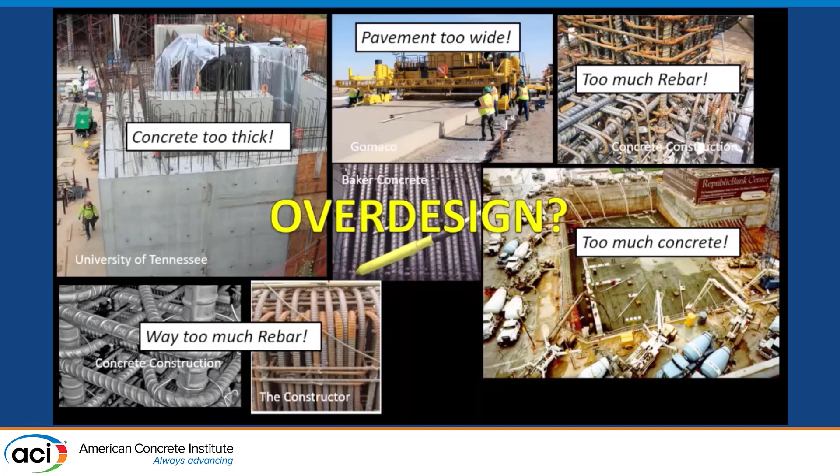So I think most of the time when people are talking about overdesign, they are talking about the topic that Eamon so thoroughly covered: the focus on the so-called overdesign surrounding the 28-day concrete cylinder compressive strength, the so-called F'(C) or specified strength. That technically is a specified 28-day strength of lab-cured compressive strength.

To get a number from the laboratory that is worthy and qualified to be used to assess the quality of the concrete, it's got to be cast per C31, initially stored on the site for up to 48 hours without moisture loss, 60 to 80 degree air temperature, limited to 68 to 78 if you're looking at 6,000 psi or more.

It also says shielded from direct sunlight, which is a direct copy of the Roman Empire's imperial concrete specification written by Marcus Vitruvius in his book On the Nature of All Things. He says aggregates for concrete need to be shielded from sunlight and moonlight, and ASTM decided well, we got to do that. There was always this thought that people exposed to too much moonlight would go crazy, and that's the source of our word lunatic. I've also heard that only lunatics would wait 28 days, or one full lunar cycle, to test their concrete.

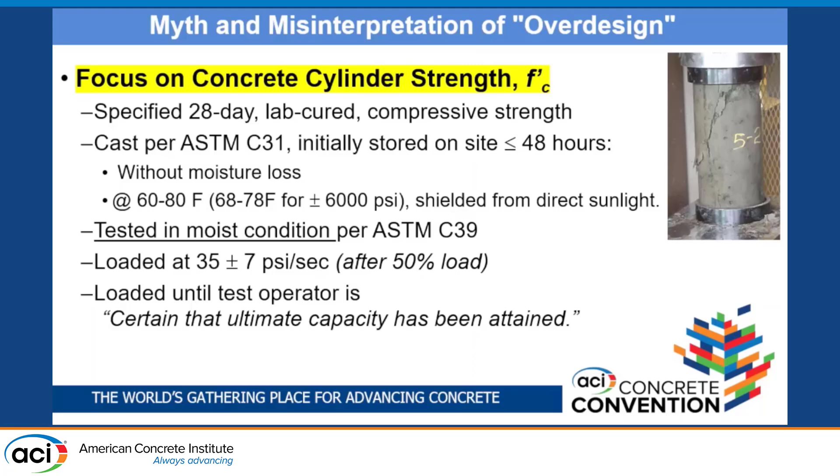Now, when we're talking about this overdesign that people like to swear about, let's take an example. Let's say you got a specified compressive strength of 5,000 psi, but then some clown comes along and says, well, the truth is it said 5,000, but we really meant 5,470. That brings out all kinds of responses. That 470 psi is usually referred to in the field as that blank overdesign, and you can fill in that blank with whatever expletive you would like, colorful or off-colorful.

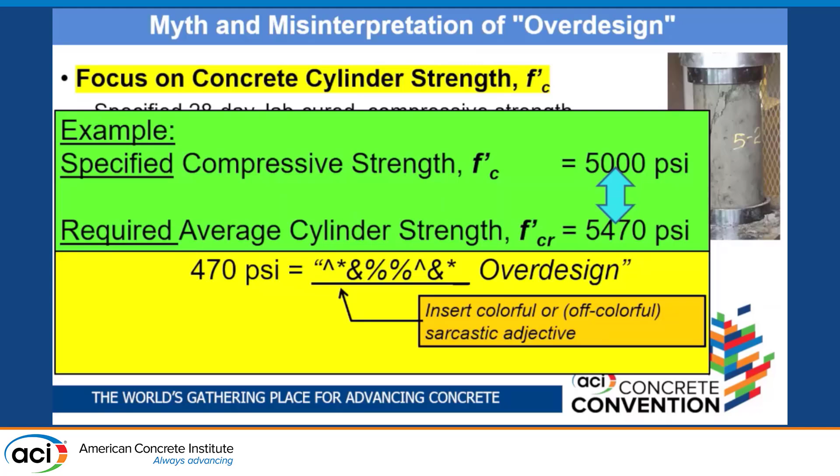So what are some of the misinterpretations? That this costs money, consumes resources, carbon footprint. Yes, it can - anytime we put more cementitious material in, we're going to cost money and consume resources and carbon footprint. But even worse is the misinterpretation that this is arbitrary, it's conservative, it's some sort of building code imposition. It's a convoluted way to get higher strength than specified. It's going in the back door.

This is the specifications bait and switch. They told us 5,000 in writing, but now they're telling us 5,470. And it might cause people to say, why in the world didn't they just specify 5,470 instead of the 5,000 that they wrote in the specs in the first place?

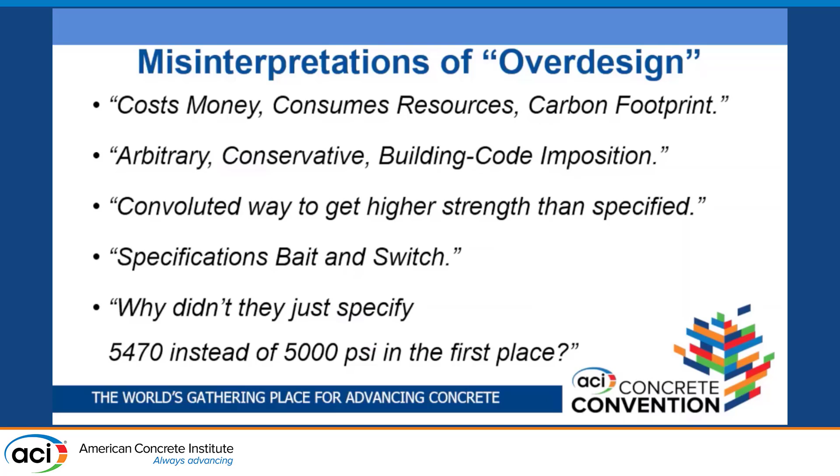All right, those are interesting issues. Now, some constructive interpretations would be that this increases the safety and reliability of concrete structures for all users, all passersby, all future owners. It helps to define the tolerance for the acceptability of our strength test, and it can reduce the time and cost spent dealing with and arguing with low breaks. And these were also on Eamon's list.

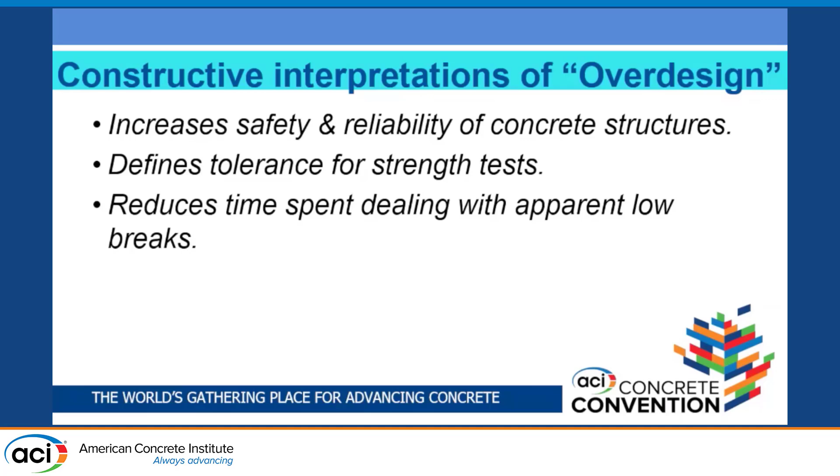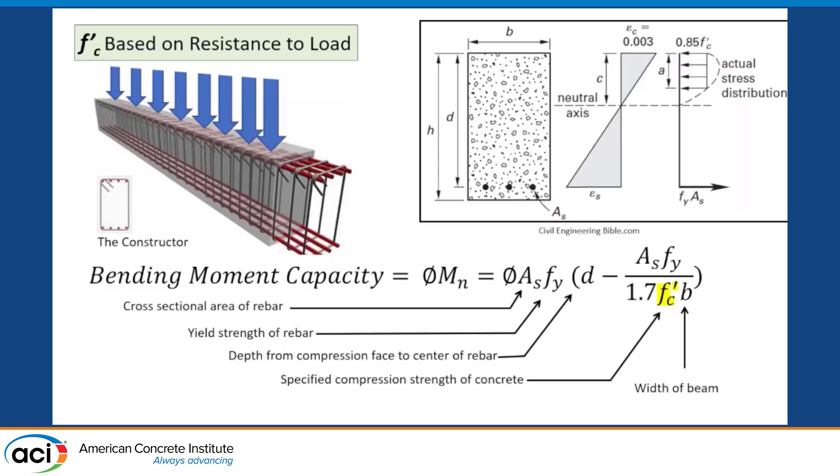Now, where does that F prime C come from? Many of you know this exactly. Part of the F prime C comes from the engineer's calculations based on the mathematics and the mechanics of what compressive strength do we need to assume in this structure to be able to provide the necessary resistance to load. But there's another side of that coin - there's another independent source of what F prime C we're going to need, and that's based on providing adequate resistance to the environmental exposure.

Going all the way back to the 2008 edition of the 318 code, that's when the environmental exposure system was introduced to try and quantify the environmental resistance that we need. That was born as a result of NRMCA's P2P initiative.

The F0 is not exposed to freezing and thawing, up to the F3, which may only be with us a few more years, that's exposed to freezing and thawing. It's wet, and we've got de-icing salt on it. The C0, there's no real corrosion risk. The C1, it's kind of moderate. The C2 is now we've got some real chlorides in place. And there's others for sulfates and moisture and that sort of thing.

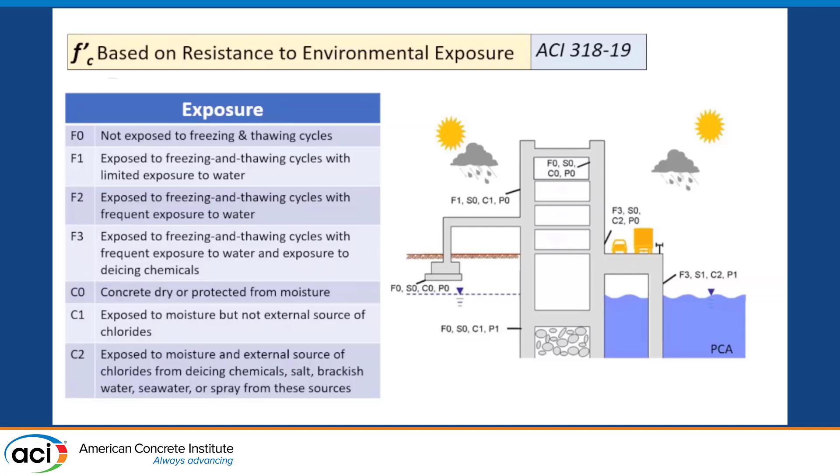The design engineer is required to clarify what is the intended exposure classification, and then you work through the fine print and some charts and tables, and you end up associating minimum specifiable compressive strengths that are connected to various exposure categories.

For an example that I want to run today, let's say that this structure is going to be exposed to salt, exposed to freezing temperatures while it's wet, and we are concerned about corrosion of reinforcing steel. That would bring us to an F3 that says 5,000 psi is the minimum specifiable value, and the C2 tells us the same thing. If we have an intense corrosion environment, we're going to need 5,000 psi.

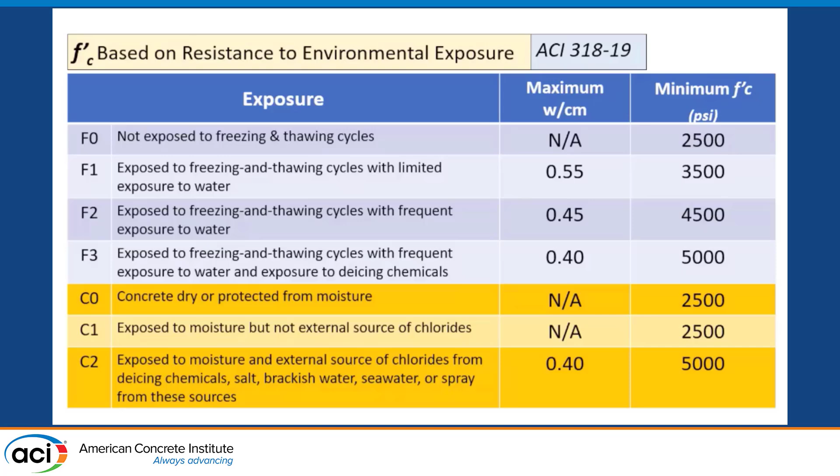Now, interestingly, where do these numbers come from? If we were to take the ACI 211 default values for the relationships between water-cement ratio and compressive strength, the solid line is non-air-entrained concrete, the dash is air-entrained. So we see as the water-cement ratio goes down, strength goes up.

And if we also take a look at some old Bureau of Reclamation information about how water-cement ratio influences the permeability of the concrete, we'd say that if we want a more durable concrete with lower permeability and other related transport properties, and we want high strength, that's going to throw us down to this region of the curve. This association here is, if it's going to be moist and freezing,

without the de-icing salt, we want to be right around a water-cement ratio of 0.45 or less. That would intersect the 211.1 data at about 4,500. So a number like 4,500 becomes a minimum specifiable for a freeze-thaw environment.

If we then say, well, I need even lower permeability, let me go down to around a 0.4 to come down on this permeability curve. That's going to help keep the water and the salt and the oxygen and the CO2 and the pets and the small children from being sucked into the concrete. And then we run that up, and that's going to intersect the air-entrained curve at about 5,000. So there's some justification for these numbers.

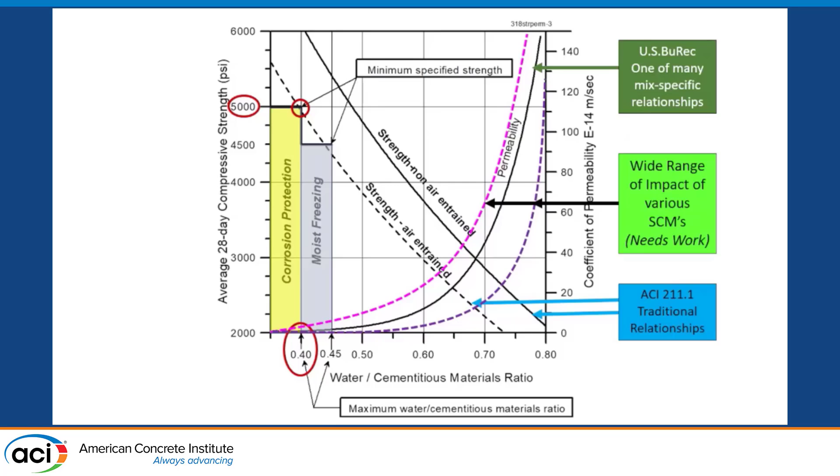Now, since those relationships are mix specific, I think there is no question that that wide range of other modifications on the mix gives us some room. We need to do some work there, and I know Colin and Doug Hooton and a number of people have been working on that. Anyway, that's where that comes from.

So let's take a quick example. We've got C2 corrosion, we've got F3 freeze-thaw, and let's say the structural engineer designed it for 4,500. When the design calculations were done, 4,500 was picked. If we take a look at our C2 and our F3, that says 5,000. So what was supposed to happen here? You say, all right, I've got a strength and mechanical properties requirement, I've got a durability requirement, the highest requirement is going to govern.

So we got a minimum specifiable value of 5,000 psi for a structure that maybe looks something like that. And Bruno, these steps look even worse than when you were on campus.

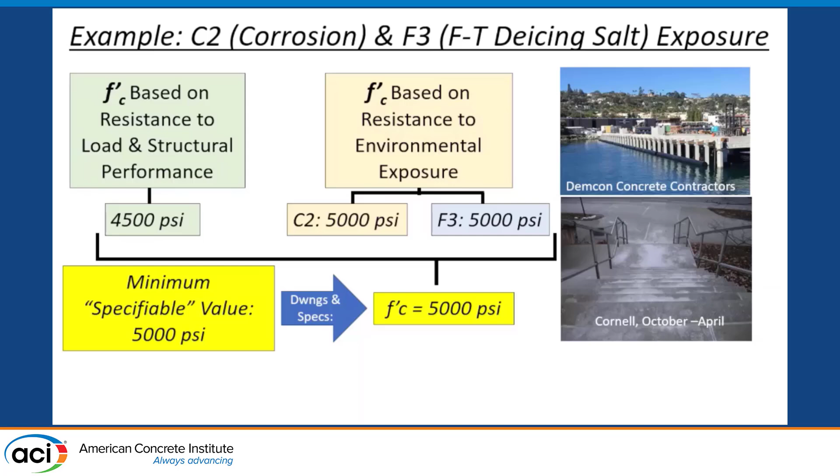All right, so we got the 5,000 psi. Now, if the specified strength is 5,000, is it okay if the average strength is 5,000? Well, let's look at that. Here's the good news.

If your average strength is 5,000 and your required strength is 5,000, then let there be dancing in the streets, because half your breaks are stronger than required. But unfortunately, there's not going to be peace in the valley, because half your breaks are weaker than required, and that gives you about a 50% chance of meeting the spec.

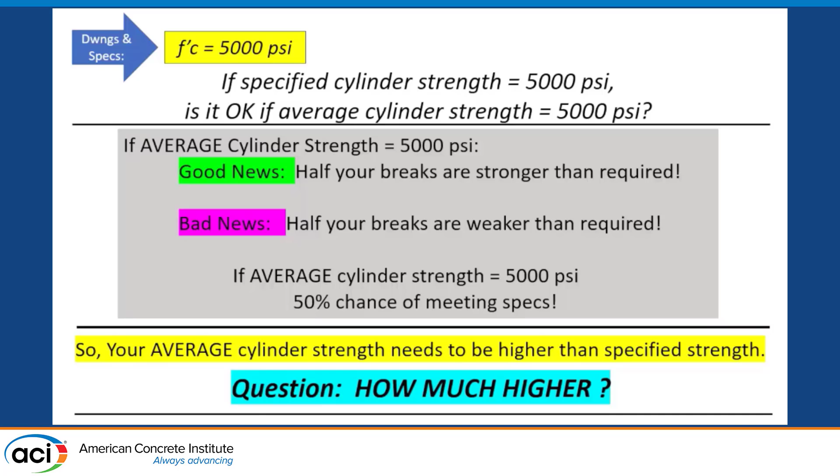Imagine in that pre-construction conference, you're talking to the structural engineer, and you say, we promise you, we're going to meet your strength requirement at least half the time. Okay, that ain't going to fly. So if your average has to be higher than the specified, how much higher?

And that's where we go into the mysterious land of the so-called overdesign. What would be the lowest average strength that you could have that would be consistent with meeting those requirements 99% of the time? Let's be bold. Let's go all the way to 99. And that's the question that we're posing here today.

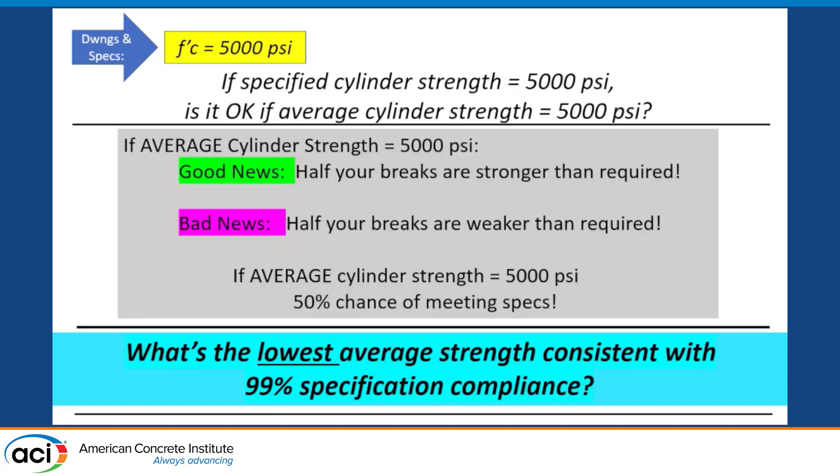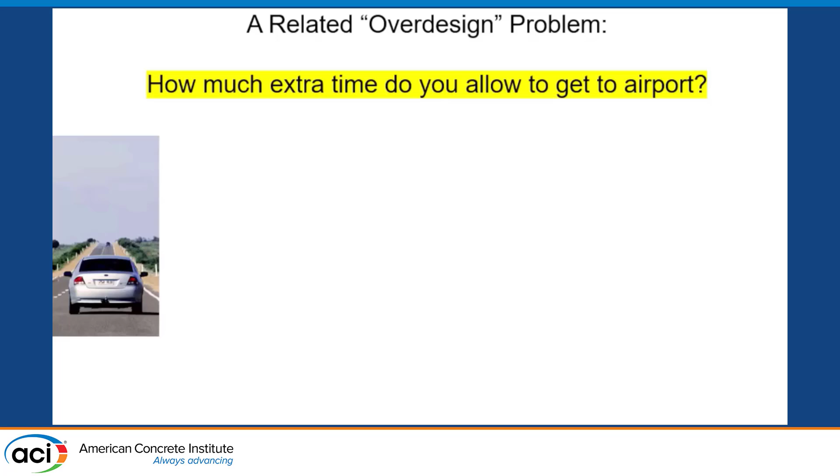What I want to share with you is that's not all that unusual of a question for all kinds of other applications. For example, a related overdesign problem: how much extra time do you allow to get to the airport? Because you got to pack your car, you got to get in the car, you got to back out of the driveway, you got to remember what you forgot, you got to pull back in, you got to go grab whatever that is, underwear, chapstick, your laptop, whatever it might be. Then you head down the road, and then you get to the airport, and then you look and look and look for a place to park.

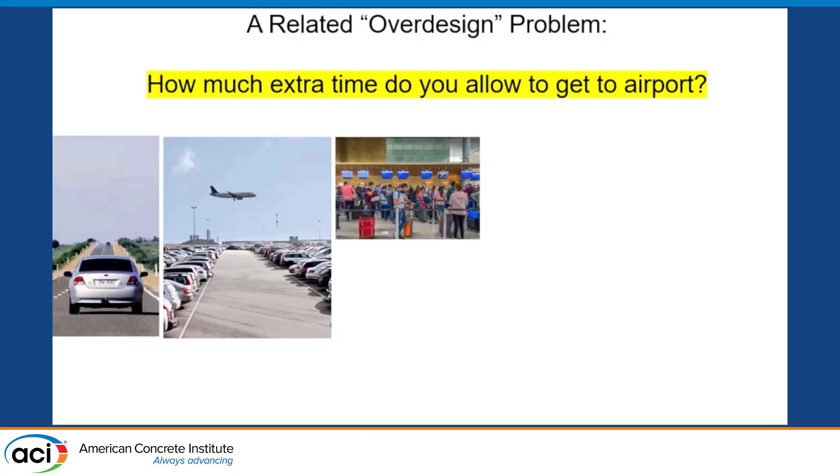This is almost precisely what happened to me last Friday morning at Syracuse Airport, okay? And then you got to get to the check-in and get rid of your suitcase, and then you got to go through TSA, and then eventually you stand in the jetway as your plane is gone. All right. Now, this will be no surprise.

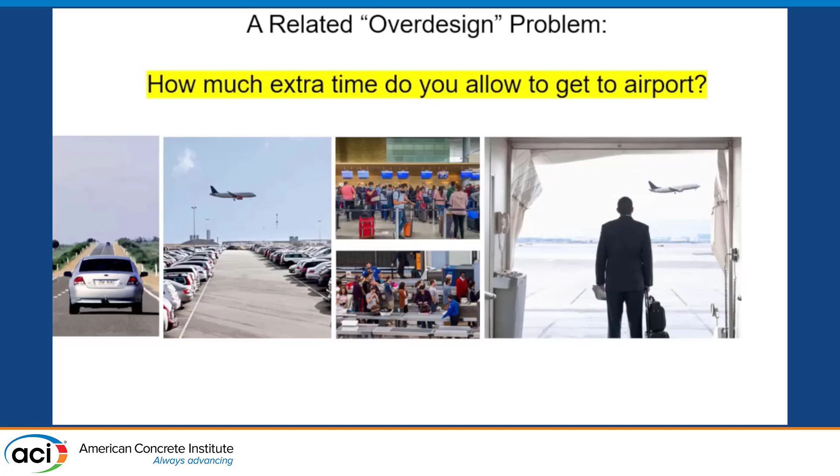Nerd that I am, I've been tracking this. My longest time to Syracuse Airport after 37 consecutive trips is 130 minutes, a little over 2 hours. My absolute shortest, and man, I was sitting down on it for that one, was 62 minutes. But on average, it's 93 minutes.

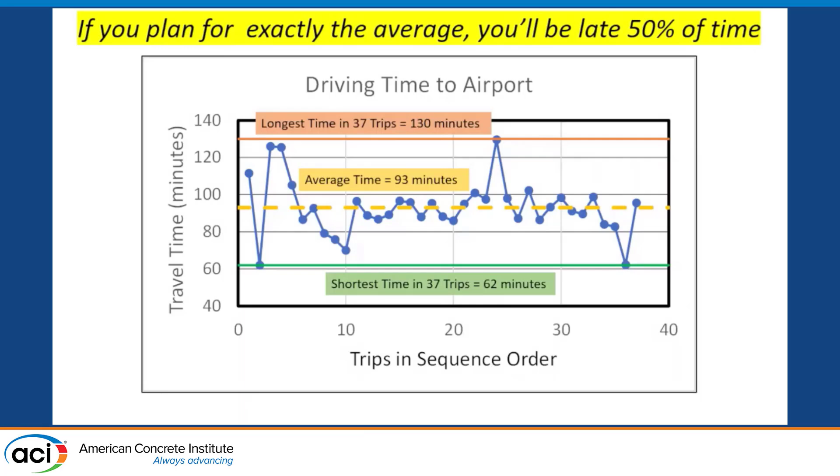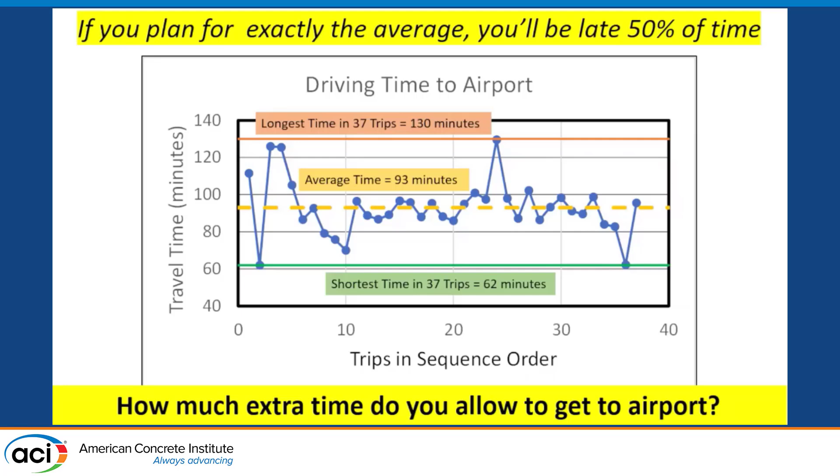So if I would say, okay, I'm going to depart for the airport 93 minutes before I have to be there, half the time I'm going to make it. That's really pretty good. But also half the time I'm going to be saying goodbye to my airplane. So how much extra time do you allow to get to the airport? You've all got an answer to that question, okay? And I'll tell you, last Friday morning, I wish I had put an extra 15 minutes on that baby, okay?

Now, is that extra time that you are allowing to increase your chances of not being left at the gate and then being told that the next plane to San Francisco is sometime in August? Is that extra allowance that you provide an overdesign? Okay, there's a thought. Now, here's some good news for you. A very good friend of mine from New Zealand, Andrew Dallas, past president of the New Zealand Concrete Association, once told me, Ken, if you never missed a plane, you are getting to the airport too early. Okay, so how close to the edge do you want to live?

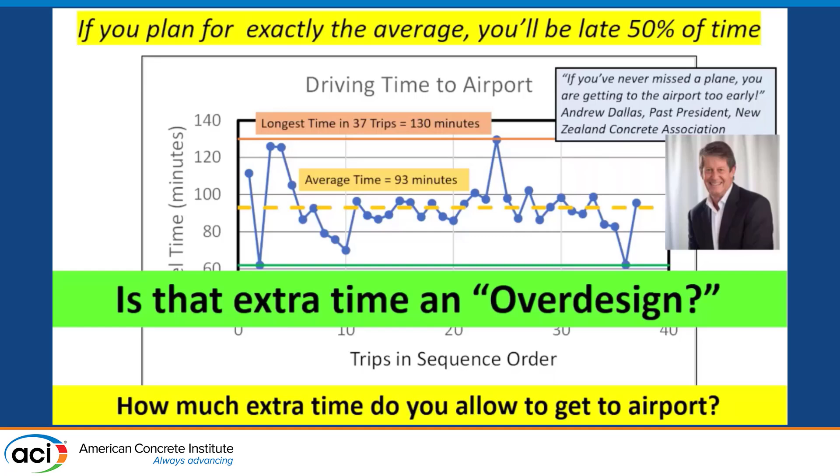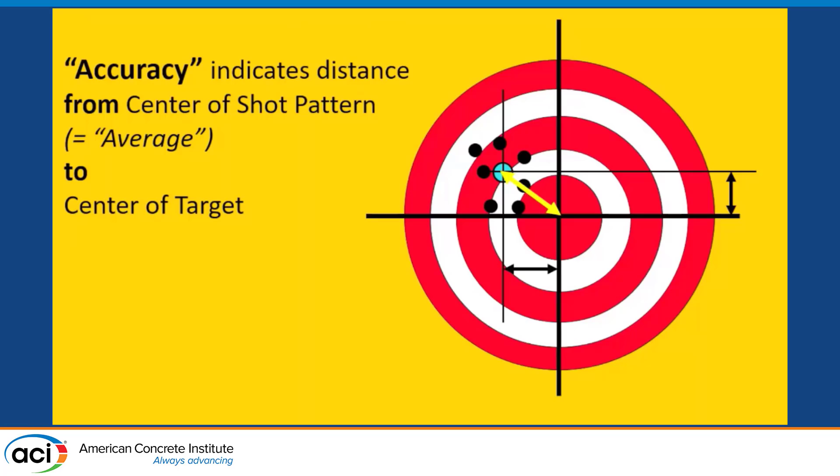Okay, now let's do an entirely different analogy. Let's look at a target. And let's first of all talk about the difference between accuracy and precision. Accuracy would be represented by how far the center of your shot pattern is from the center of the target that you are shooting at, okay? And precision is how tight your shot pattern is.

And I'm looking at Larry here, and if we're not careful, he will pull out his pistol right now and shoot out this screen. Larry, I'll bet you put about 6 right in the center there. Okay, so precision. All right. They confiscated that at the airport, right? And you tried to tell him this is a visual aid for Ken's talk.

Okay, all right. Now, the common measure of precision is that we take a look at how far from the center of the shot pattern would you have to go to draw a circle so that you would cover 68%, let's call that 2/3, of all the shots. So if we said we had a 5-inch radius from the center of the shot pattern, what that would mean is 2/3 of all of our shots are within 5 inches.

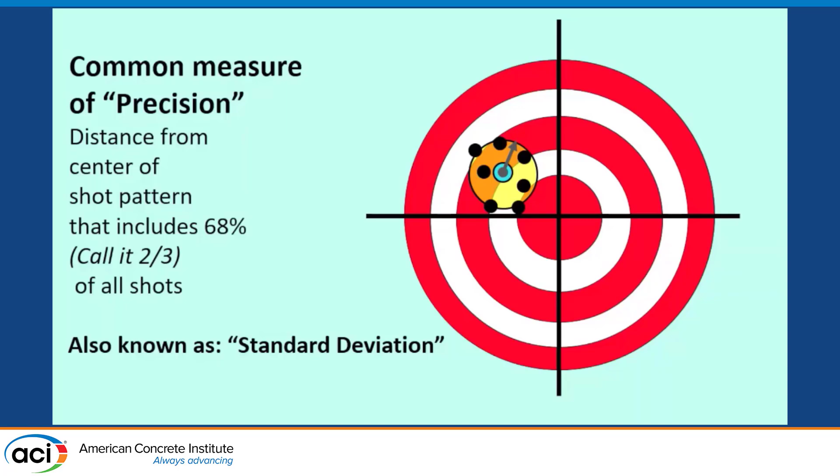Okay, now let's translate this to another problem: the famous legend of William Tell, revolutionary soldier in Switzerland and Europe's greatest archer. One day he offended the town magistrate, so the magistrate punished him by saying, 'You're such a famous archer, what we're going to do is tie your son to a tree, and you've got to use that great crossbow of yours to hit the apple we put on his head.'

Now let's ask Bill Tell to go out to the field first and shoot a whole quiver of arrows into that target. Then let's get a bunch of nerds to measure how far all those arrows landed. If we found that 2/3 of all those arrows were within 5 inches of the center of that shot pattern, we could call that a standard deviation, which is much better than a non-standard deviation, that's for sure. So that would mean about 1/3 of your shots are more than 5 inches high, low, or wide.

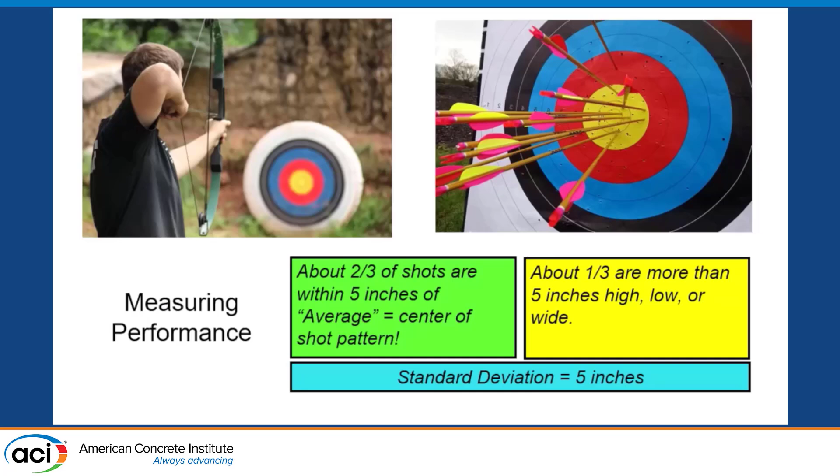Now let's go back to Bill and his son. So we're shooting, and if he's got a 5-inch standard deviation, that's bad news. That means 2/3 of those arrows are going to land within plus or minus 5 inches of the apple. That also means that from the apple down, there's a 50% chance it's actually going to kill his kid. That's not good. That's not good at all.

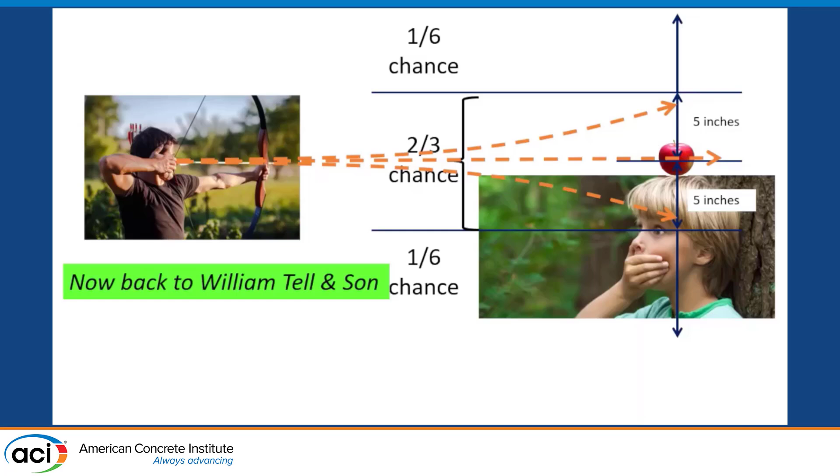So what's the solution to that, if the rules of the game permit? Well, let's raise the stupid apple. But here's the cool part: how far we raise the apple depends on the skill of the archer. Let's say Bill's having a bad day, we'd have to raise it way up there. But what if the child's mother shows up and she's really good? We can lower that apple back down, because she is a better, more precise archer.

Now, what if we get men in tights to shoot? We better put that apple 5 or 6 feet above.

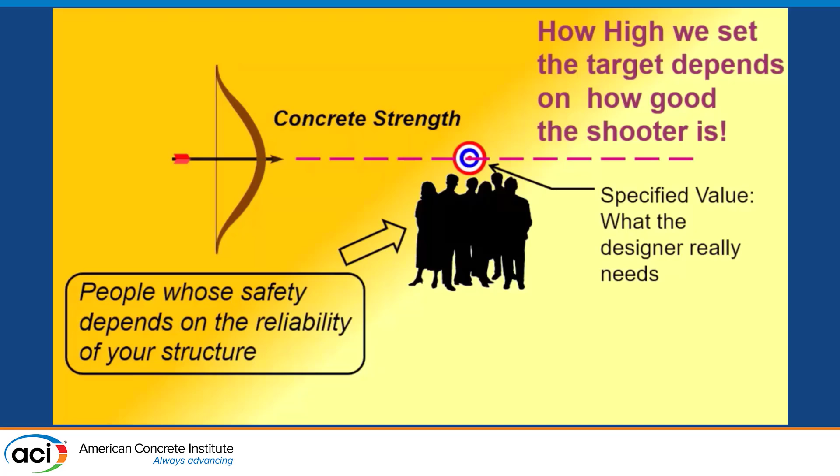Now that is what we are trying to do with overdesign. We've got a whole bunch of people who depend on the quality and integrity of that concrete, and by how much are we going to raise that target to make sure those people — not just the owners, but the people who work and live and play in that structure, the people walking by or parking in it — how are we going to keep them safe enough?

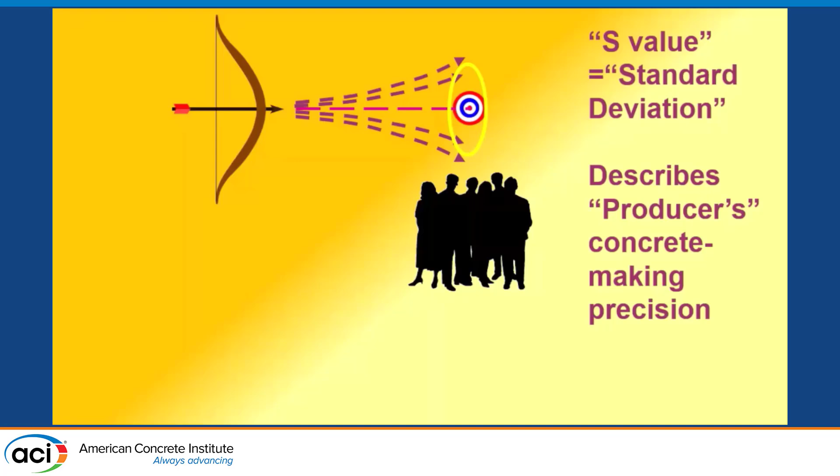So we're going to raise it up, based on what the standard deviation is — but not a standard deviation found in a code, a standard deviation unique to a particular concrete producer, with the idea that the better, the tighter the precision of a given producer, the lower we can drop that target. That's why there isn't a fixed number for how much the overdesign is — it's a function of the skill and capability of that producer.

Okay, but here's some breaking news which really messes up the game. That standard deviation we're going to use is not just a representation of the concrete producer. When the standard deviation gets high, the general interpretation is that the concrete producer is getting a little sloppy. No — the standard deviation is based on data for concrete made by the producer, sampled and tested by the test lab. So if the test lab's a little sloppy, it's going to look like the concrete producer is a little sloppy. That standard deviation really is a joint venture.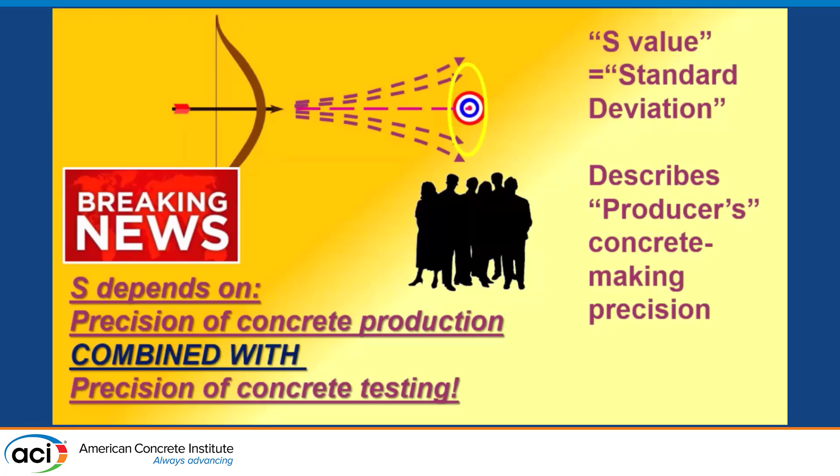So the required overdesign depends on the individual producer's unique value of standard deviation. We could take a look at some actual cylinder breaks there, and exactly as you just saw, what we're going to find normally is periodically there's going to be some breaks lower than F prime C, but we don't go to the wall and hit the panic button, as you just understood, okay?

So every now and then this is going to happen — this is the 'every now and then you have a bad day.' And then the question is, how bad does a day have to be to cause you to talk to your spouse about it when you get home that night?

Or perhaps not talk to anybody when you get home that night. The definition of a really bad day is when an individual strength drops more than 500 psi underneath. And that's the one where, if that happens one time in 100, okay, that's just part of life, as we heard.

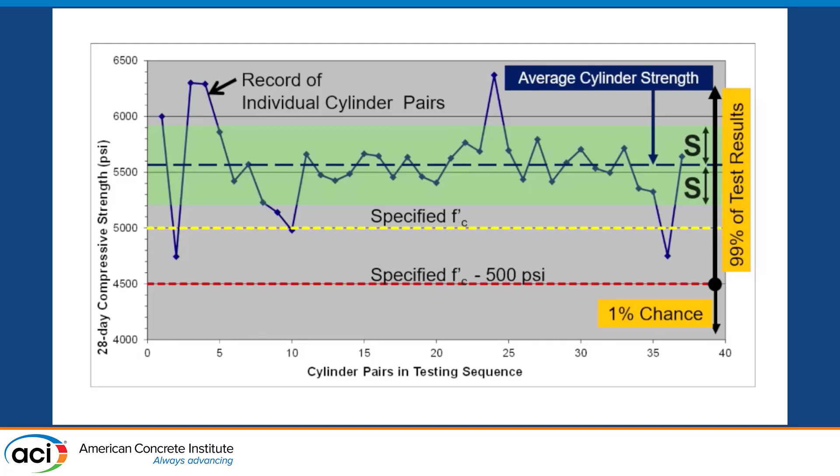Okay, so we get the average, and we can figure out the arithmetic of the standard deviation, and we can say, yep, two-thirds of all our cylinders are going to be in that band somewhere. We can use that and calculate the standard deviation. So occasionally we all have suboptimal days, and that's just life. That's nothing to quit our jobs about.

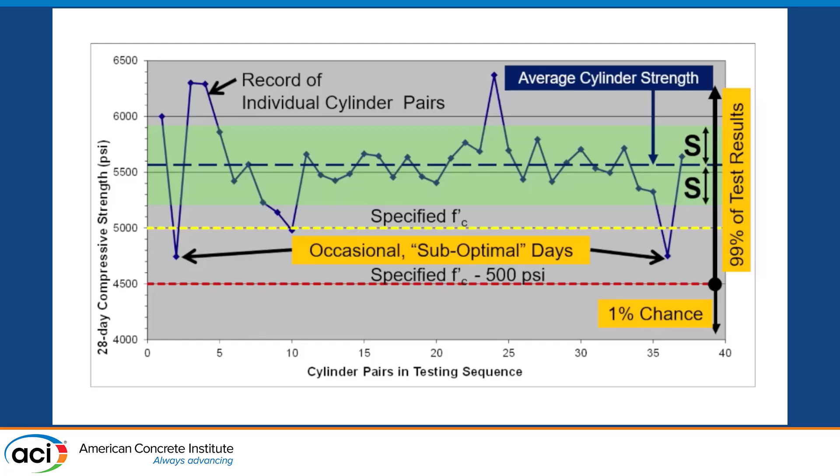Now, another really cool thing we can do is not only record the individual test results, but also what's known as the running average of 3. The individual test results say, yes, every now and then you get a bad test for any number of possible reasons, from production to testing. The running average of 3 starts by taking the first 3 tests and getting their average, then shifting over one and getting the next average, and shifting over one, and so on. What that does is filter out a whole lot of the noise in the system, and it starts to reveal systematically what is happening with the production and the testing.

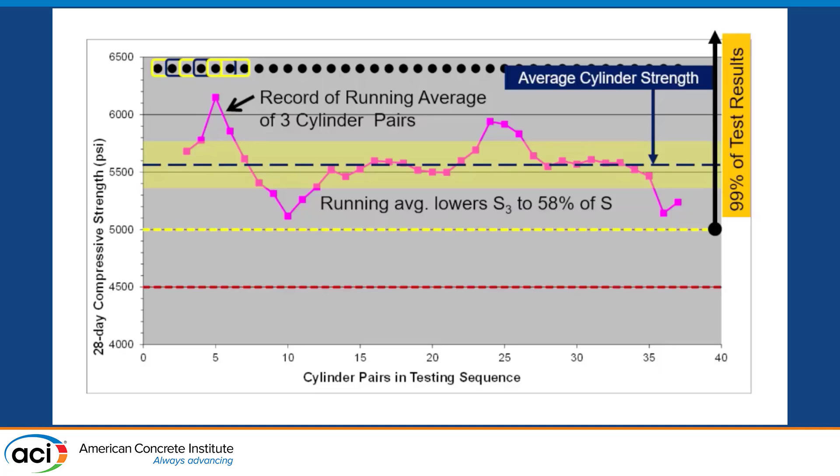So when you plot the running average of 3, you end up with the same average, but a tighter band. In fact, that standard deviation is only about 58% of the original standard deviation. What we're worried about here is systematically, when we're looking at test after test after test, the overall program, that's where we don't want them to dip down underneath the specified value. But if that happens 1% of the time, that's okay too.

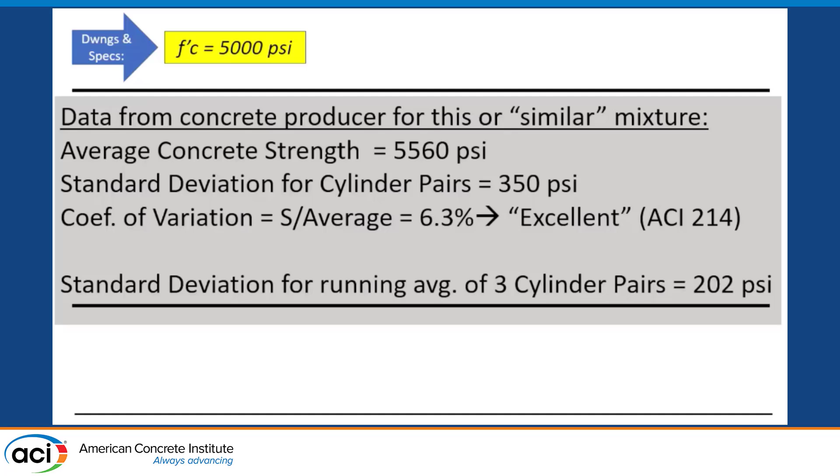Okay, so we get data from the producer. We got an average concrete strength of 5560. We got a standard deviation of 350. That's a coefficient of variation of 6.3%, which ACI 214 would say is excellent - excellent quality control. When we do the standard deviation for the 3-cylinder pairs, that's 202. Now, what's the lowest average strength that would signal 99% specification compliance?

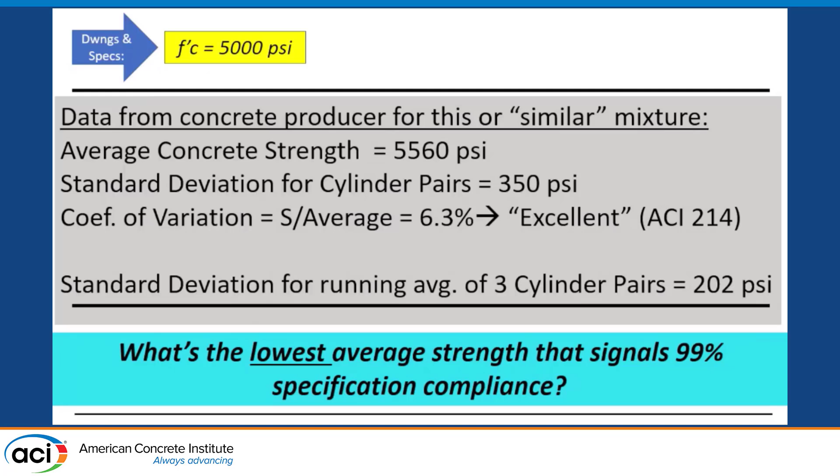Okay, that's the question. Now, sadly, to answer that question, we have to go through the looking glass, and we're going to use some probability and statistics, and that probably is the signal to evacuate the room here immediately.

Eamon was very gentle. He put some normal distribution curves up there. He didn't dwell on them because he knew that would be like pulling the fire drill.

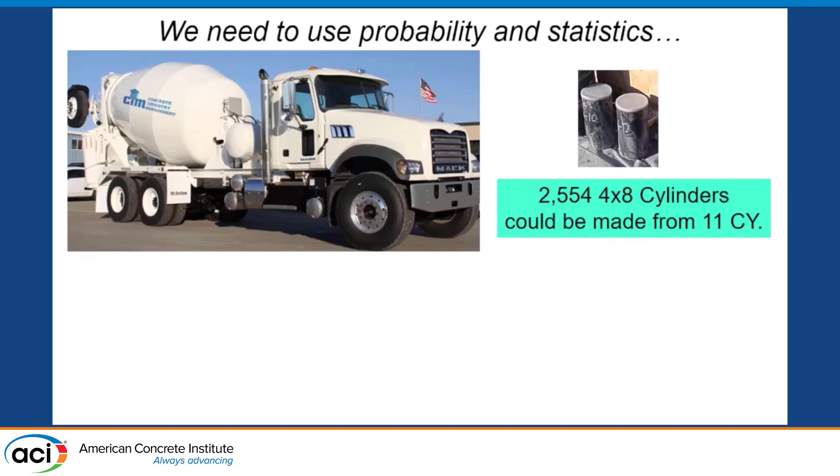All right, so we need to use probability and statistics, and why? Let's say we're using 4x8 cylinders, for example. Do you realize that out of an 11-yard truck, you could make 2,554 4x8 cylinders? That's possible. That would be what the cool people call the sample space.

In Night Moves by Bob Seger, one of the great phrases was, 'working on mysteries without any clues.' And we are almost there - we are working on mysteries with just a tiny bit of information. Statistics helps us fill in the blanks to estimate the strength of the vast majority of the concrete in the structure that was not tested.

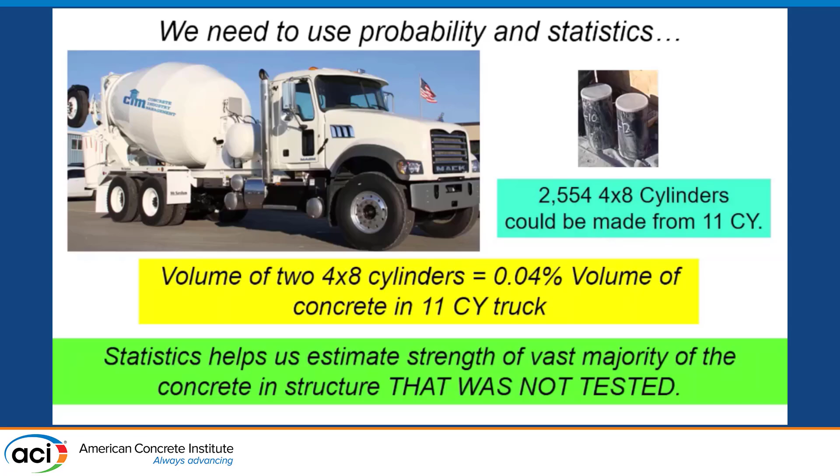We got hard numbers from the lab. That tells us what was tested. The question is, what's the next break going to be? And what's the break in 3 trucks from now going to be? That's where statistics comes into play.

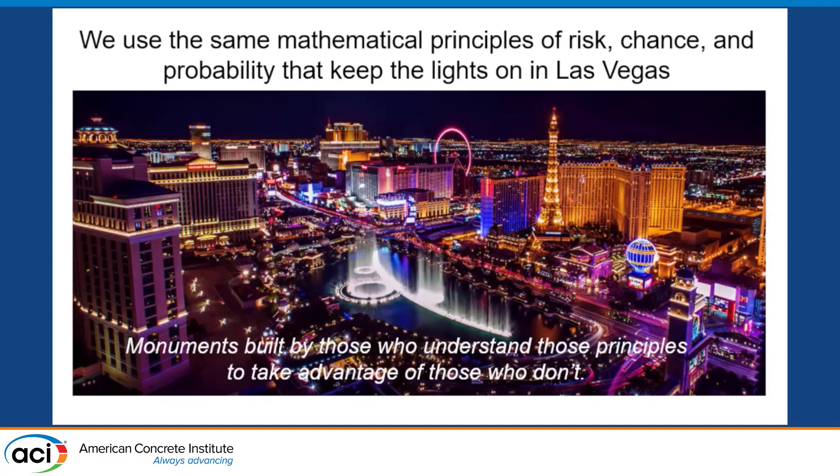And we're going to use the same mathematical principles of risk, chance, and probability that keeps the lights on in Las Vegas. We all know Las Vegas is a series of monuments built by those who understand these principles for the sole purpose of taking advantage of those people who do not understand them.

Now, let me give you an example. Let's say you're playing poker and you're sitting down at the table and you've just been dealt 5 cards.

You're sitting at that table holding 5 cards in your hand, trying to size up the situation. Wouldn't it be amazing if you got dealt a royal flush? Bet the farm right now. Of course, that'd freak everybody else at the table. That's not going to happen, because you only have a 0.00015% chance of being dealt a royal flush.

So you're holding your 5 cards. Those are your test results. You know the value of those 5 cards. What you don't know is where the other 47 cards are. They might be 2s, they might be aces. So you got to make a bet based on having a little tiny bit of information to make expectations and estimates about a lot of stuff you don't know.

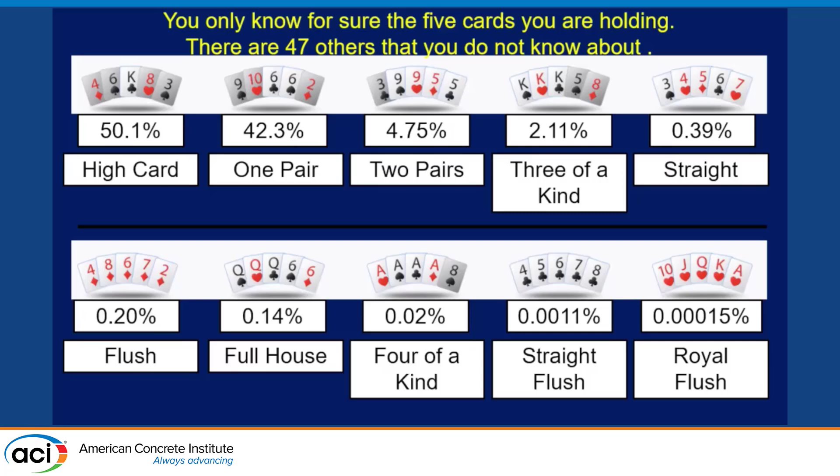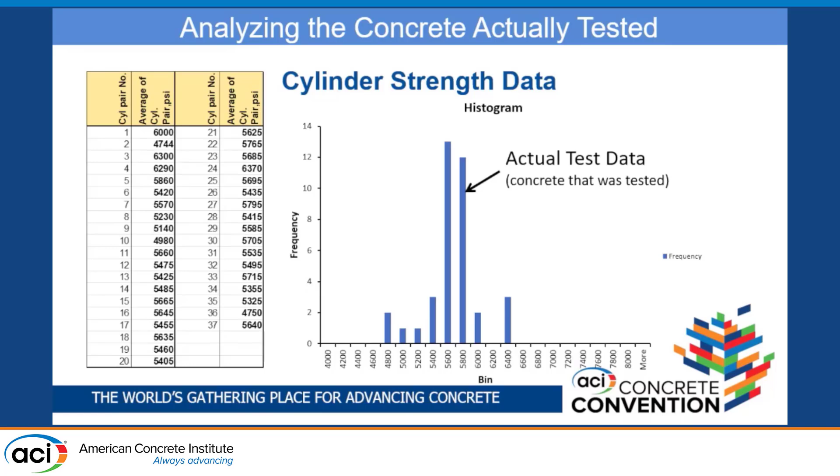So we take that cylinder test data and group it into a diagram like this, called a histogram, in which we take all those cylinder breaks and bin them into different categories. Okay, so that's real, those are the real numbers. But what we don't know is filling in the blanks. Where are all the others?

So a standard technique is to take the histogram, those blue lines which are real, and turn them into the orange bell-shaped curve, or the normal curve, called that because it is absolutely normal. It's what you typically would expect in this kind of evidence. What's the beauty of making this statistical transformation? All of a sudden you have a basis to start talking about the numbers you do not know yet. So we can make a better estimate of the much larger data set once we make that transformation.

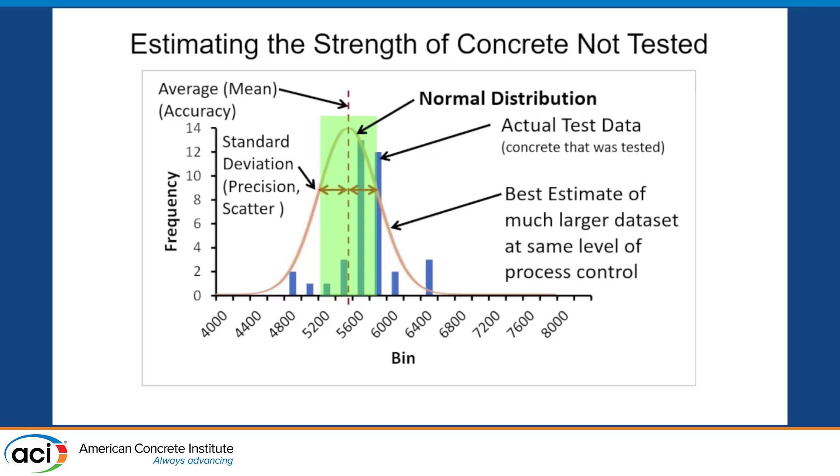And Eamon showed you these curves, but he was smart enough to say, let's let Ken fight with these. Okay, and I'm not smart enough to do a good job of it. So this is now what we are expecting from the concrete that is not tested.

And all that statistics boils down to a couple simple equations. Our target strength is going to be specified strength plus 2.33S, and for our 5,000 PSI example, we got a bargain in the industry today. Tell you what, we're going to mark that strength down 500 PSI. Mark them down and move them out. So we're going to give you a free 500 PSI. And then we're going to say, I want a 1% risk of getting lower than that.

Then we're going to take that running average of 3, because we're more worried about a systematic error than an everyday bad day. Pretty much the code says if you have a bad day 1 day a week, don't quit your job. If you have 3 bad days in a row, you might be thinking about a career change. And that's essentially what the code is saying here.

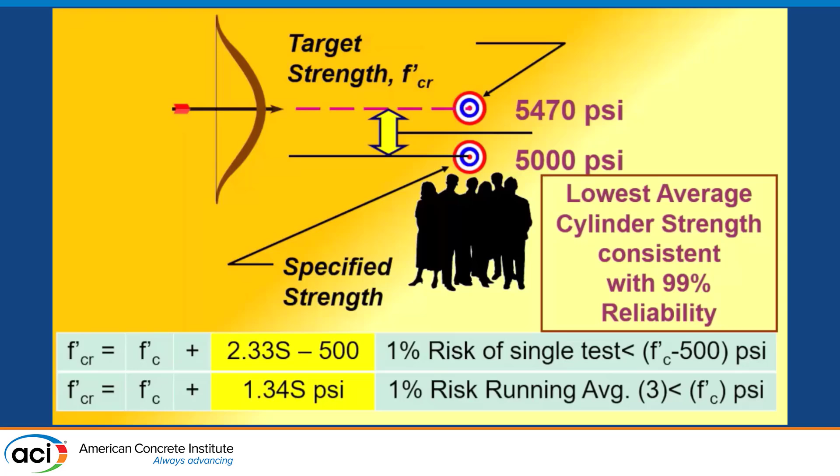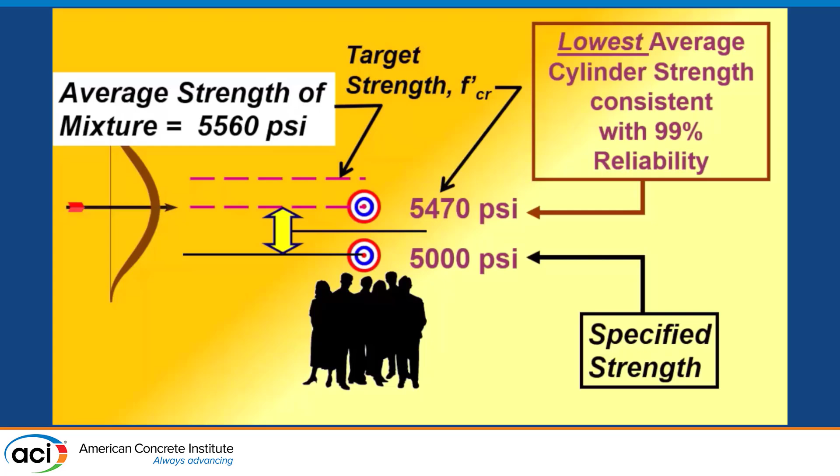So we run those particular numbers, and for the values we're using in this example, 5,000 PSI was the specified value. 5470 would be the number that Las Vegas gives us. But the good news is that the average strength of that mixture the concrete producer demonstrated was 5560. So you've got an average strength higher than the required target strength. And as the cool people would say, you are good to go.

And as was pointed out, if you can pull that standard deviation down, pull the scatter down, shoot a tighter shot pattern, then you can reduce that. That's going to require a partnership not just between NRMCA and ASCC, but NRMCA and the testing organizations, because they are both contributing to that scatter. Collins' organization could deliver cylinder after cylinder that's identical, but if the testing is all over the place, we're going to get an S that's big. So if you can pull the standard deviation down, and there's physical limits as to how low that could be, then what can happen is you can pull down your required strength. I think Eamon made that point much more clearly and a whole lot faster than I just did.

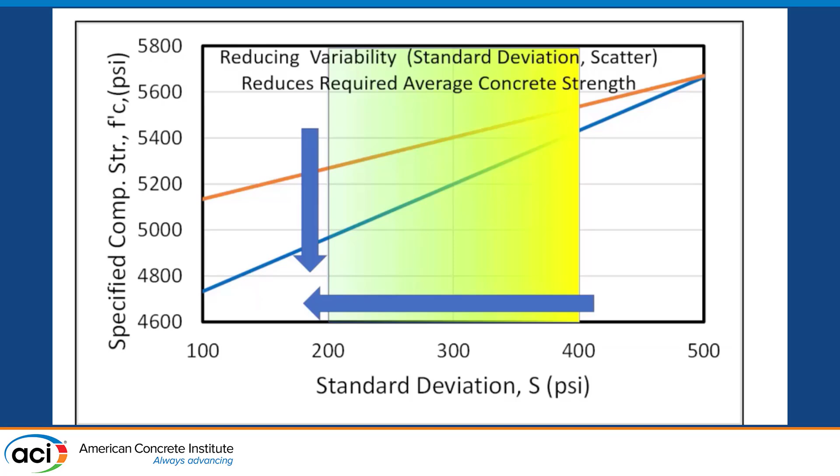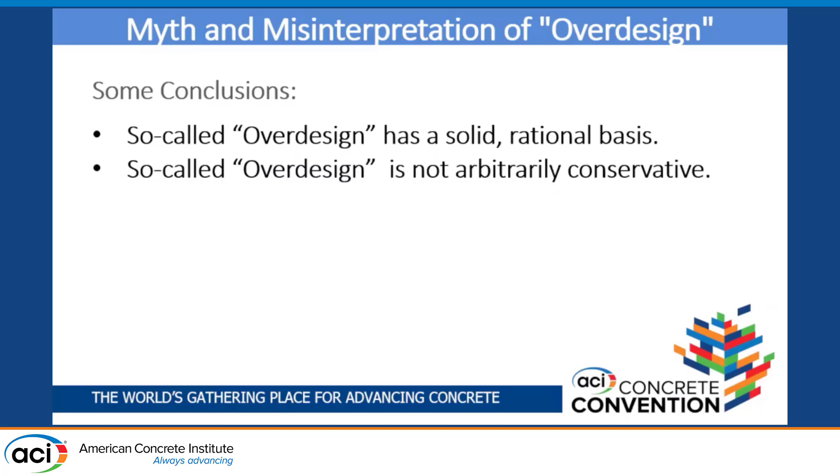Okay, so some conclusions. So-called overdesign has a solid rational basis. The so-called overdesign is not arbitrarily conservative. It's conservative, but not arbitrarily so. Greater precision in concrete production and testing can reduce the target strength in the cementitious material.

And my other conclusion, Bruce, it's an honor to help recognize your career influence on the built environment, your influence on our industry, and your influence on our institute. Thank you very much.